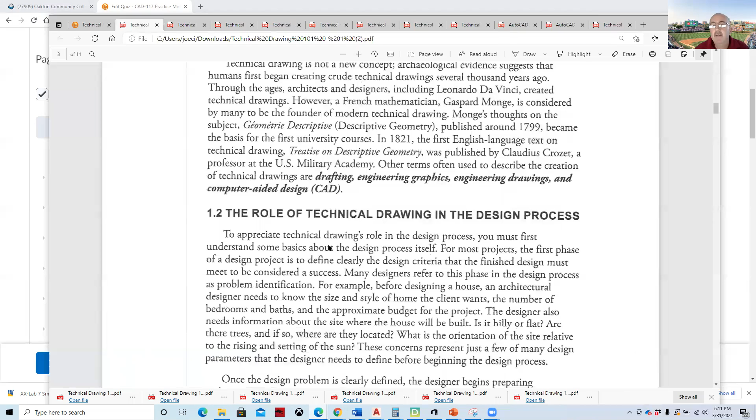But as we go through, here's our learning objectives. Just from a standpoint of running things by the book, the textbook has useful information. If you've never had a technical drawing course, this book does a good job of getting you familiarized with the process.

The first chapter goes through and talks about careers in technical drafting - electronic, civil, process and piping - and what qualities people look for. Because when you get down to it, it's a different world out there. If you want to get paid a specific wage, you want to have those technical skills that get you in the door.

So as we look at the way the questions are, here's the chapter review questions. American Institute of Architects, Society of Mechanical Engineers—they have these CAD standards. And then there are short answers to the questions and things like matching.

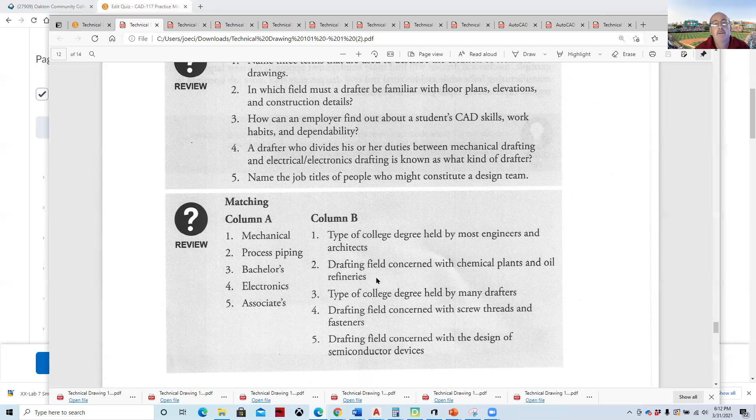Type of college degree held by most engineers and architects would be a bachelor's degree. Drafting field concerned with chemical plants and oil refineries would be process piping.

I realize you don't have the answers to this, and that's why there's the practice exam. If you take the practice exam and submit it, we will grade it. If you don't see it graded quick enough, or you need to find out what the answers are, just ping us with an email. Elle and I are teaching 7 different classes, and sometimes we need a little nudge to make sure we get those things back to you quick enough. But this is where you'll see most of these questions coming from.

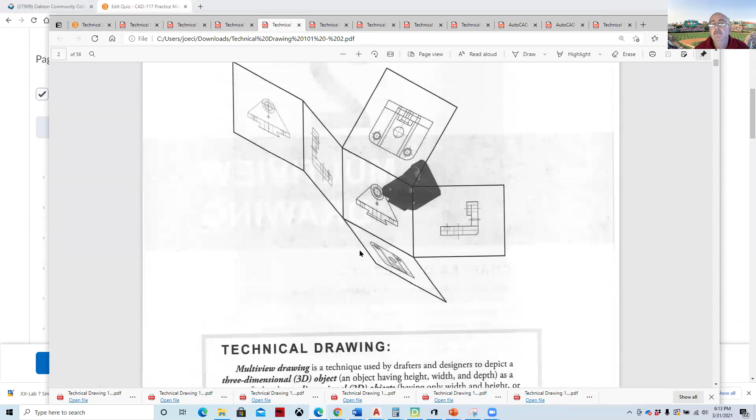Let me see if I can find chapter 2. There we go—Chapter 2 was on multi-view drawing. We did a great project where we created these 2-dimensional drawings, and then we created them in 3D. This does a great job of explaining how orthographic projection works.

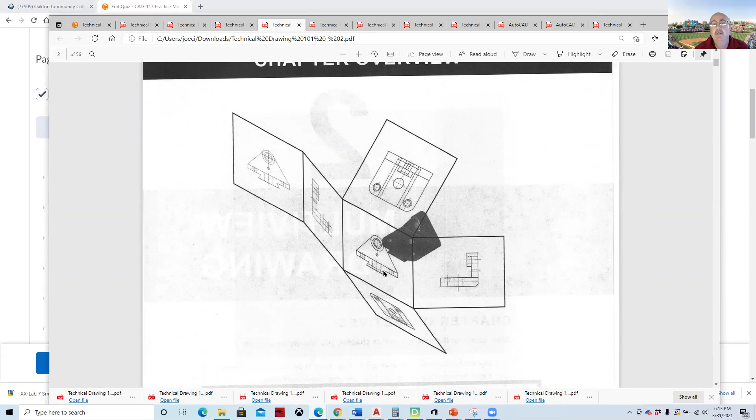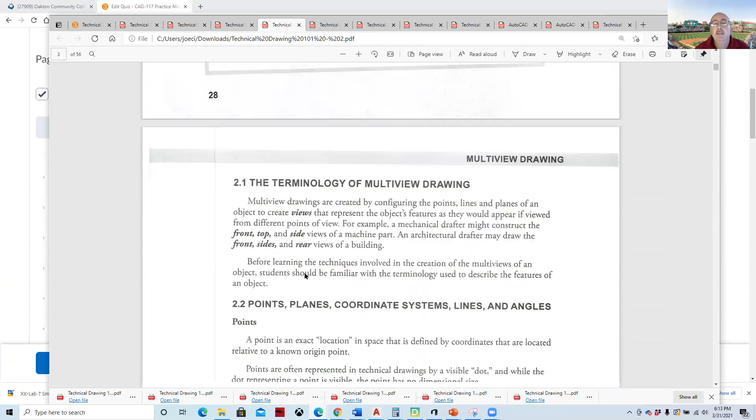When you get down to it, it's an old technique which originated with a pencil. We go through these American Society of Mechanical Engineers conventions and drafting standards, so when you get on the job you have some experience as to why things are set up the way they are.

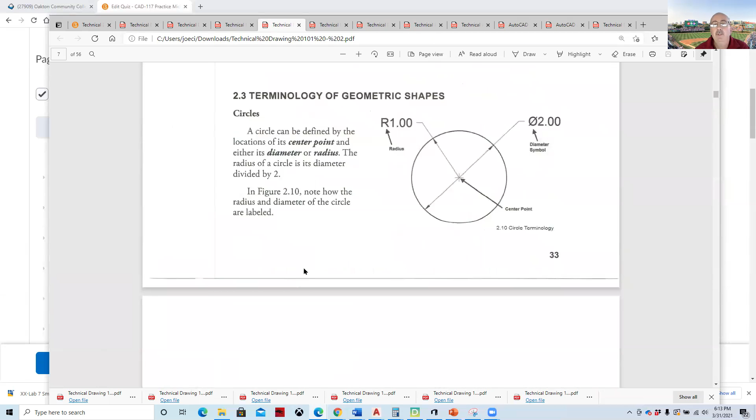We talk about orthographic drawing projection and the techniques to represent things, like this bus, in the front view, top view, bottom, right side. We use third angle projection—that's the standard for how the views are laid out and located. Everything lines up in the views, so the tires will all line up, the mirrors will line up.

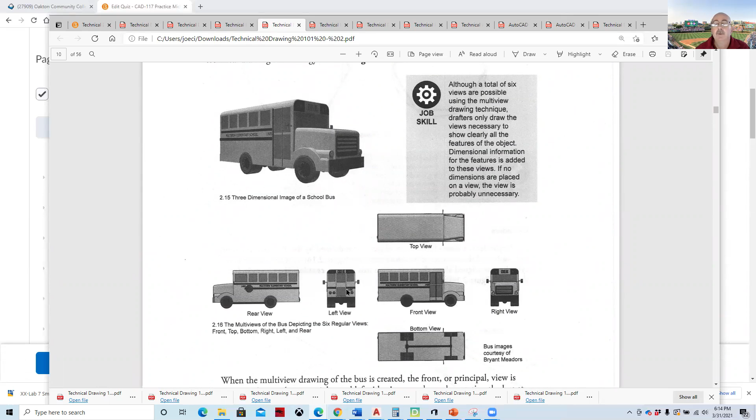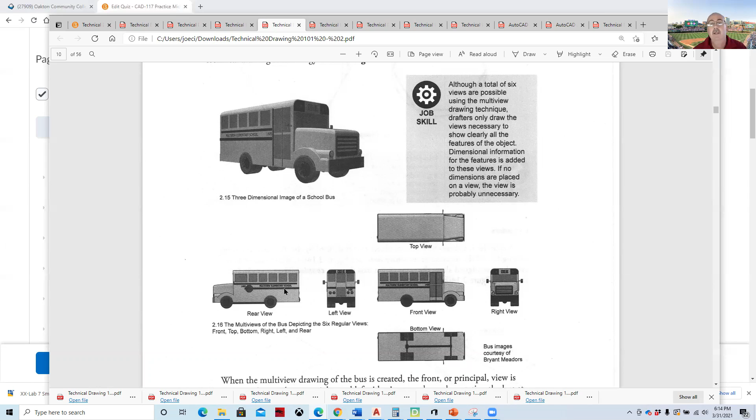When you work in an engineering job and have to go down to the shop floor, the guys welding up the bus frames will have a drawing out there, working with a pencil and a ruler, checking your drawings. Your job will be to fix them, because they never turn out right the first time.

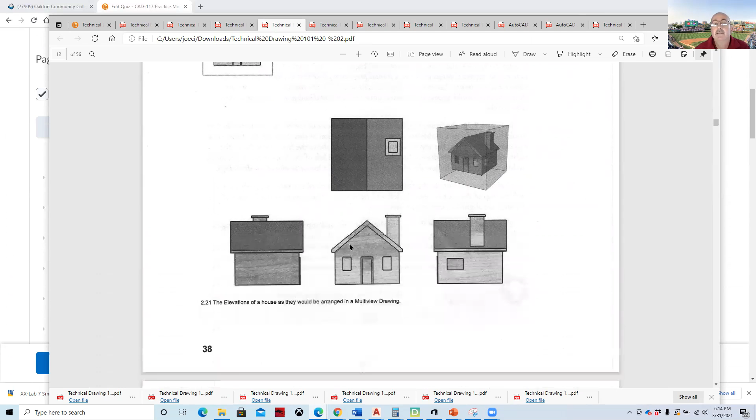Architectural drawings go through some of those same standards. The chapters have good content, and it's on you to go through and read those. Then it's my job to go through and evaluate you. In the outline of topics, we have the chapters laid out for the readings.

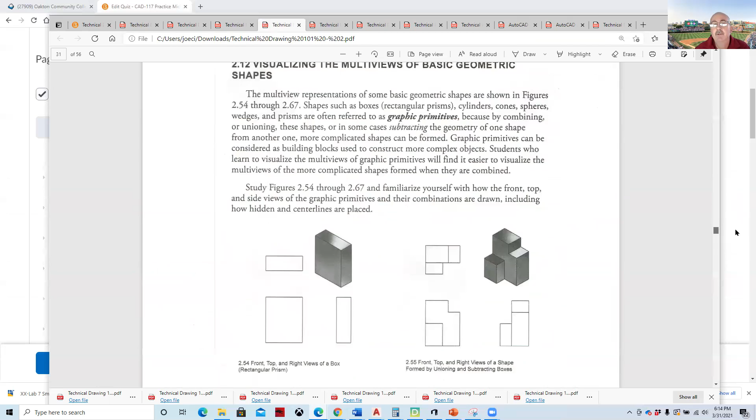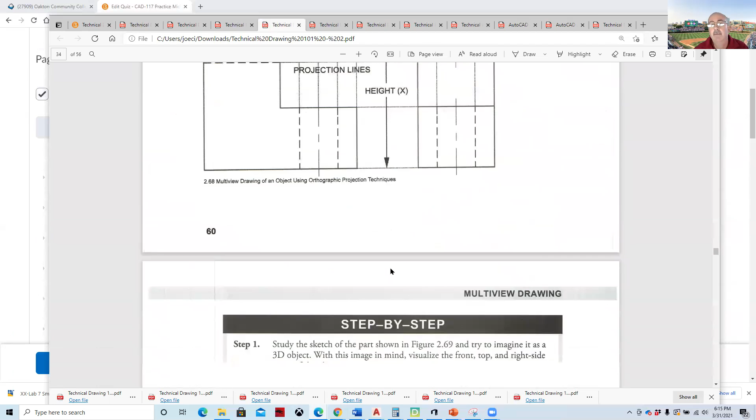We really like to do the hands-on workshop type of approach—Elle and I feel people learn best by doing. So we went through and created all these little drawings of small parts, and then we modeled them. That was chapter 2.

Chapter 3 went through traditional drafting techniques, which we really don't use so much. We have drafting tables at the Skokie campus—when we built in 2005, the guys wanted them in there, but we really don't use them much. The tables are really used more for assembly of 3D printed things nowadays.

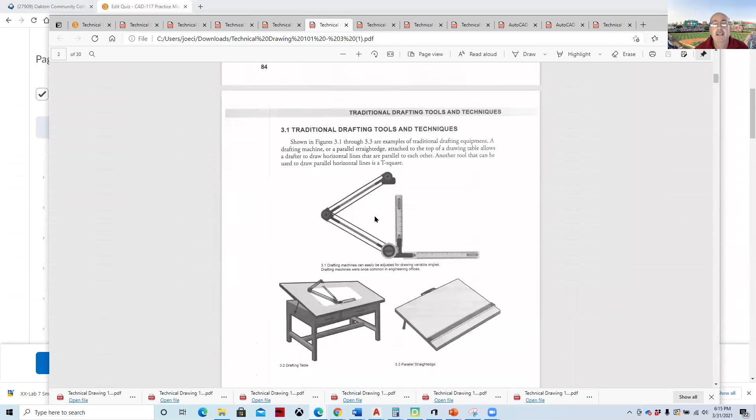So the field changes. It's probably more expensive to try to buy a drafting table and an arm than it is to go get a computer, a laptop, and the software nowadays. Same thing with the pencils.

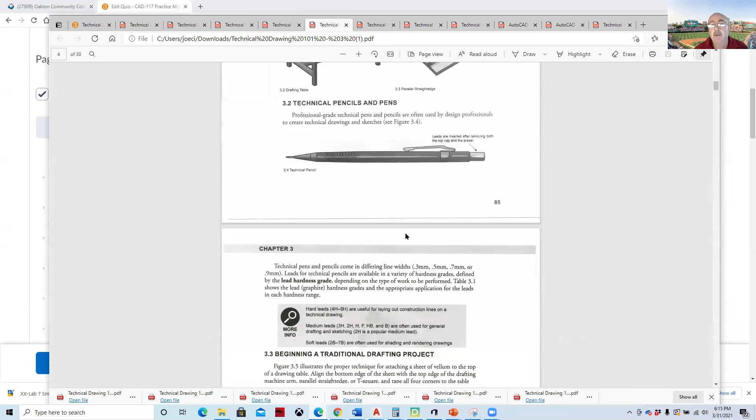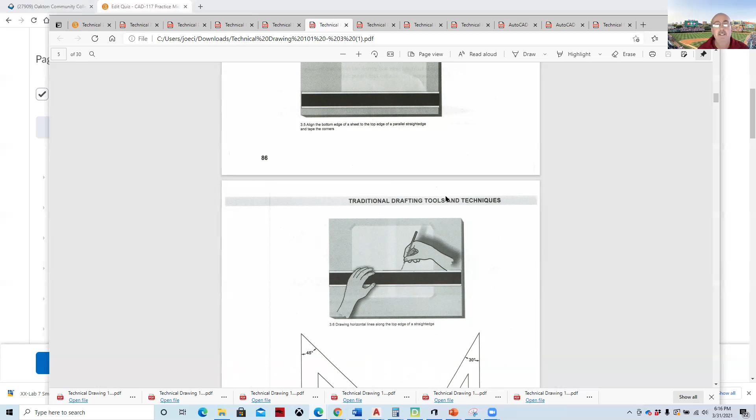But we really do want to cover that, because you'll work for somebody and go down into the drafting room and they'll have all these old pencil drawings from the 70s. It might be faster to just take a pencil and make updates to the drawing than to redraw all those things on CAD. Part of those techniques would be being able to work with scales and being able to read drawings.

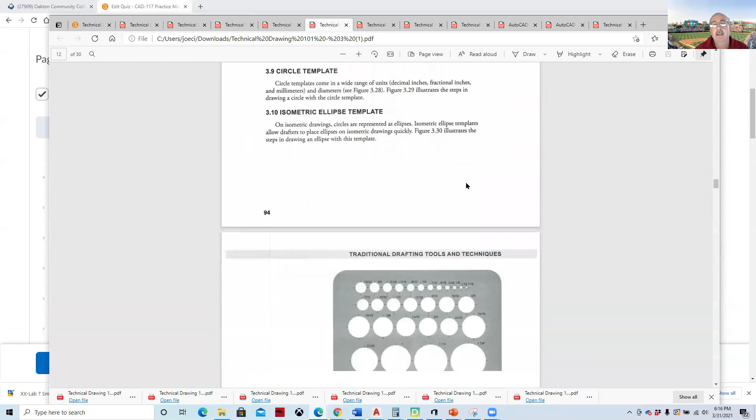And then as we get to the end of the chapters, we have more of these review questions and some of these assignments.

And we've kind of converted them over to CAD, but the techniques carry through and give us valuable knowledge.

Chapter 4, CAD, Computer Aided Design Basics. This we're kind of doing — you just learn by doing, being able to open up the CAD software, being able to work with limits, layers, line types. You'll see this a lot. I clicked on some link today and I'm afraid to fix it until I get a day when I don't have to teach classes, so you'll see it pop up again, but it's what it is.

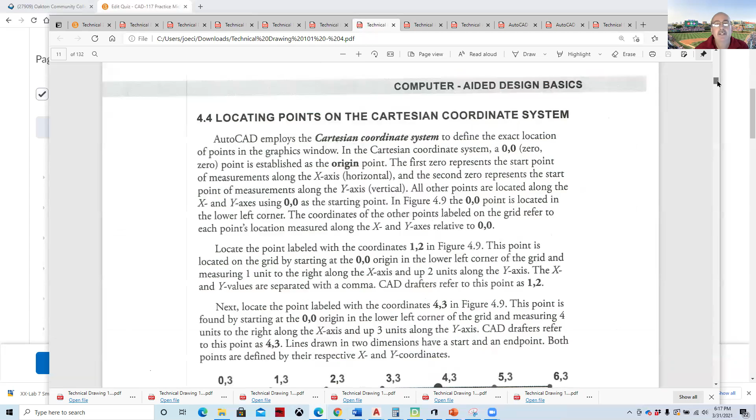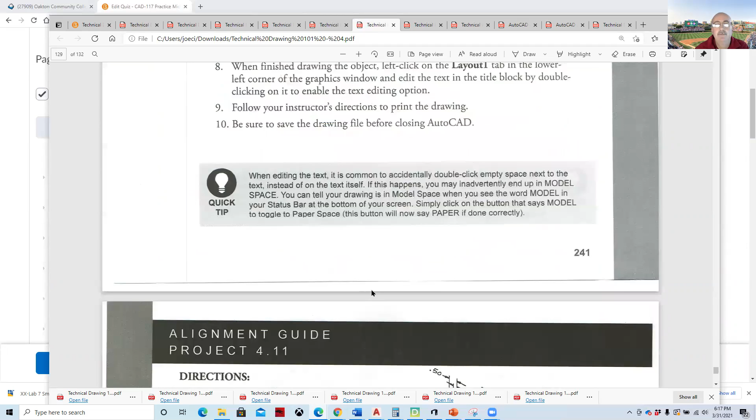The chapters are good. This one goes through creating that floor plan for the cottage, and as we go through, a lot of these are project driven. Let me zip down here — we did these mechanical assignments, and then we did these architectural assignments. Toward the end of the chapter, here's our projects, both mechanical and architectural. And then there are questions at the end of the chapters to evaluate our knowledge.

Dimensioning mechanical drawings — this is a very good chapter because at the end it goes through how to set up dimension styles. So rather than go through all the pages, we'll just look at the objectives, I think.

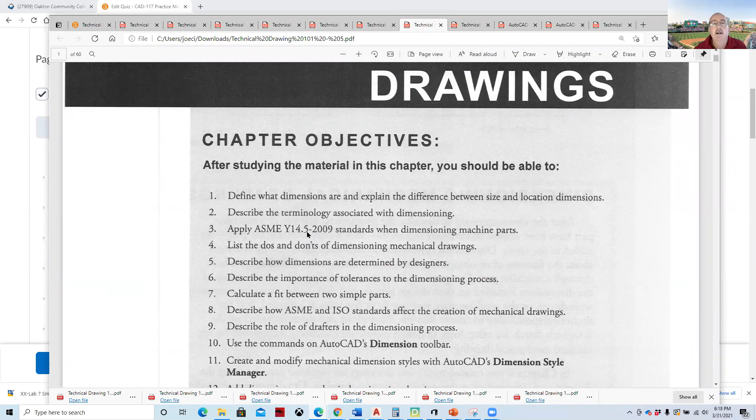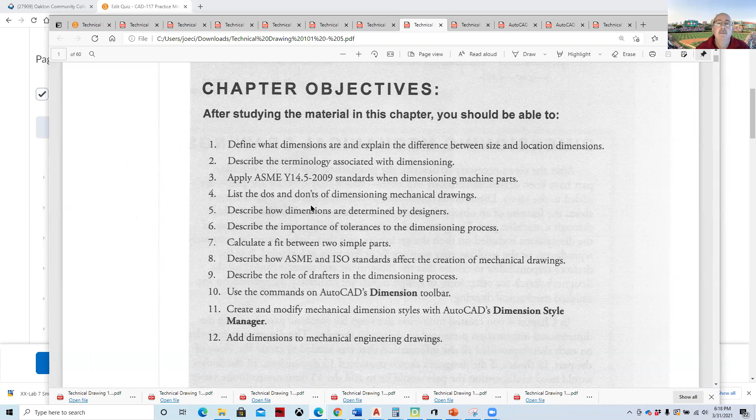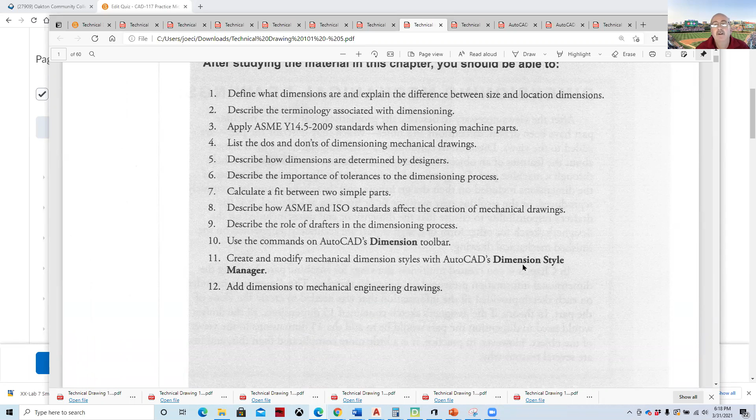Location and size dimensions. Terminology — you need to speak with the right vocabulary. ASME sets the standards, the American Society of Mechanical Engineers, and these are the standards that the guys in the shop follow. This is what will get your parts rejected if you don't follow them. Do's and don'ts of drafting, being able to work with these other standards, dimensioning processes and practices, modifying and creating these different dimension styles.

And then the same for architectural drawings. As we go through, architectural drawings tend to be more artistic in nature, and AutoCAD is a great tool. In all the years I've been working for Oakton, we've always done a lot of remodeling, and when the campus reopens, you'll kind of see that — they go through and remodel these labs, and they'll vet the floor plans through the instructors, myself.

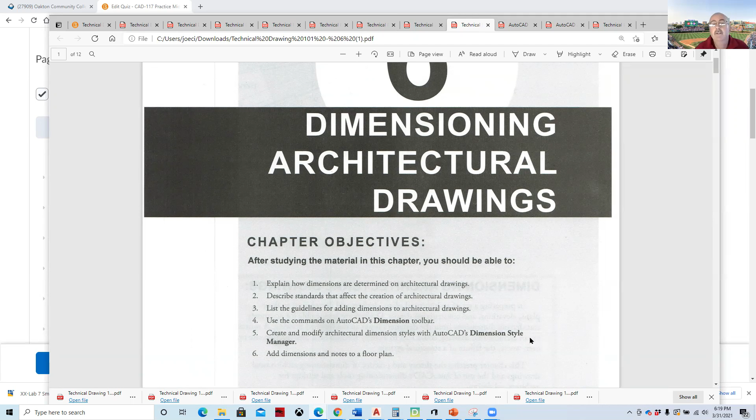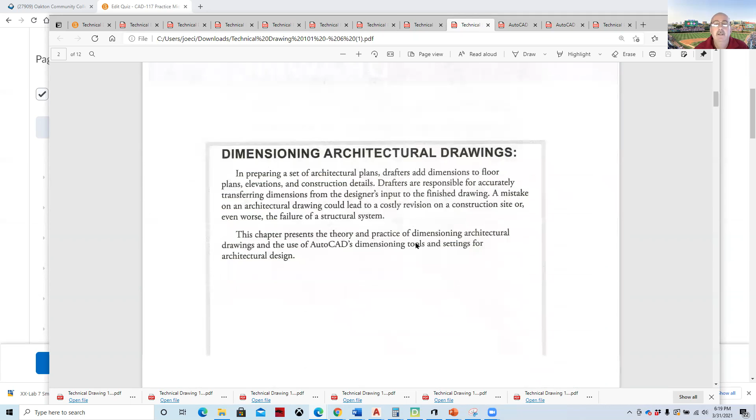We went through and did the analysis for the build for the campus in 2005, and the drawings were on AutoCAD. They showed the data cabling, the location of the projectors, the seats, and they're always needing modifications because nothing ever turns out the way it looks on paper. So being able to understand the process for architectural drawings is good, and that's essentially what we've done here. We'll go through how to create architectural dimension styles.

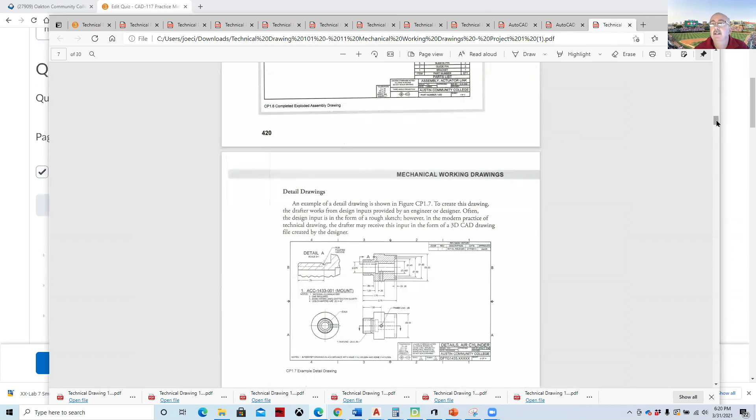Then if we look at this chapter, this is the 3D book chapter, and these are just some techniques. Let me get to the right frame here — working with solid models, and then sweeps and lofts. And then working with these mechanical projects like we're doing with this toe stop assembly.